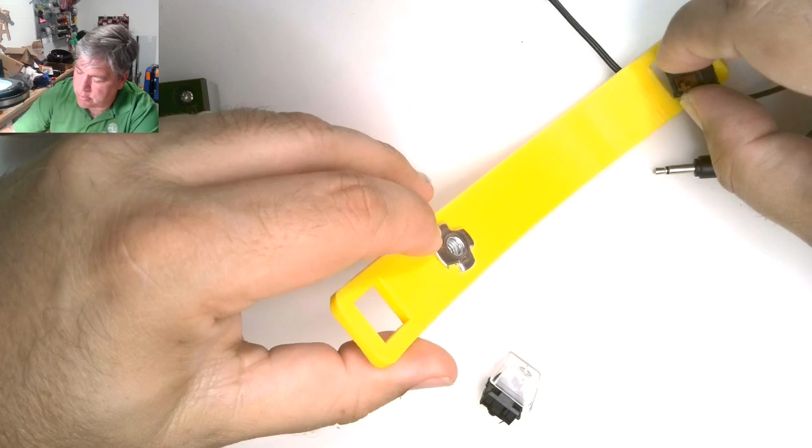The idea here is it's going to hold two MX switches, one here and one down here, in the holes which we designed in Fusion 360. These will be wired as two separate AT switches.

It turns out it really doesn't snap in, the other one pops right out. So after I solder these up, I'll hot glue them in place just for testing, to send it off and not throw this away. In the next version I make, I'll make the holes slightly smaller so they snap in better, maybe a little thinner right around it so they actually snap in and hold. I may do a couple test prints to see how it goes.

But all we're going to do here today is put 1/8 inch, or 3.5 millimeter, mono plugs on these cords, and then we'll hot glue them together.

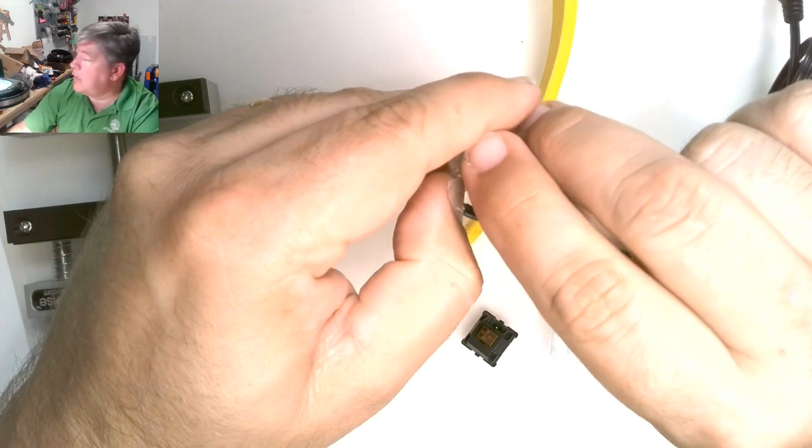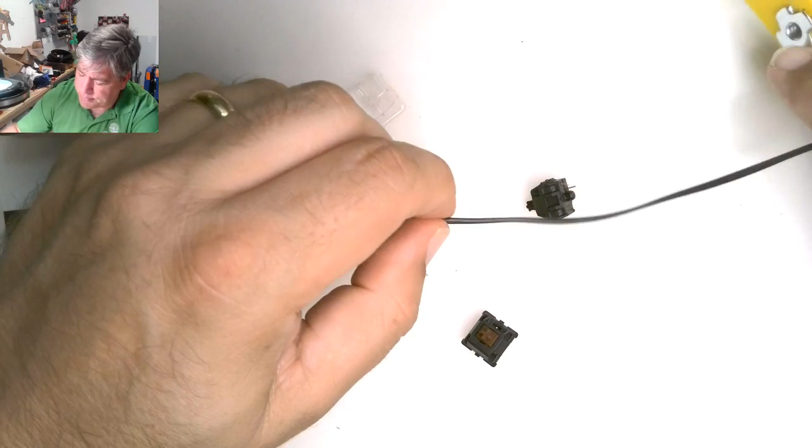Once that's done - what I'm printing right now is actually a very small light touch switch. I need 3 of them to finish this project. This is Chris Young's Ultimate Remote, and I have to finish filming something for him. I need 3 switches for it, and shockingly, I ran out of switches. So I'm going to solder these up, glue them up, then take those off the printer and make 3 of those. I'll probably do all that on camera, not sure, but probably.

Okay, so I'll probably turn off my camera here in a little bit. This is not plugged in, well, it's not going to work. All right, I won't turn on the fume evacuator because I think that'll be too loud with the fume evacuator and the printer both going, so I'll just do the best I can.

I really like this stupid stick vise. I was certain it was a waste of money - it is not, it's kind of awesome. I'm just going to tack solder these in place right here. I'm going to turn off my camera and get some better lighting and magnification, and hopefully my soldering iron is heated up enough to get started. So let's see.

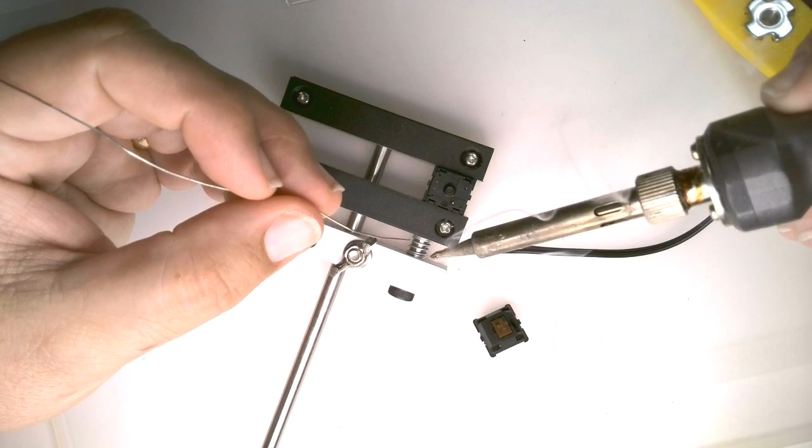When we do tack soldering, I've shown this before, but I'll bring it in to make it super clear. We put solder on the two pins like this. So the solder's on the two pins. And make sure there's solder on the wires, which they usually are. They usually come pre-tinned, but we'll add a little bit to them just to make sure. Then all we have to do is hold this in place, heat them up until they stick together, hold them in place while they cool, and then do the other one like that.

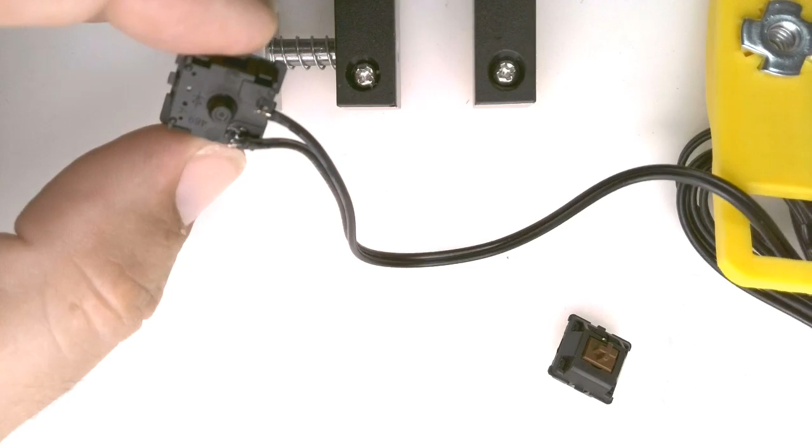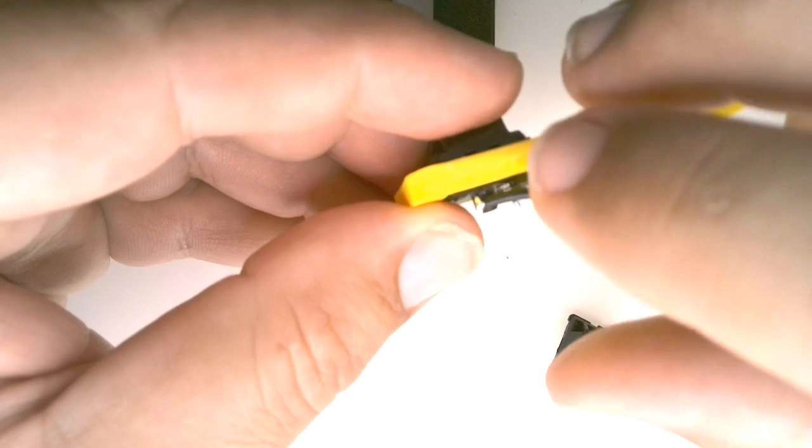And that's it, they're soldered together, and we're going to be holding them together with hot glue anyway. So now if I pull this back through carefully, I should be pretty good. I might want to turn that 90 degrees like that. Yeah, I think that actually fits a little better. We'll take this, run the wires down the side, and we have this quarter-20 threaded nut here, so I don't want to run the wires on the bottom right here because I want to be able to screw into this.

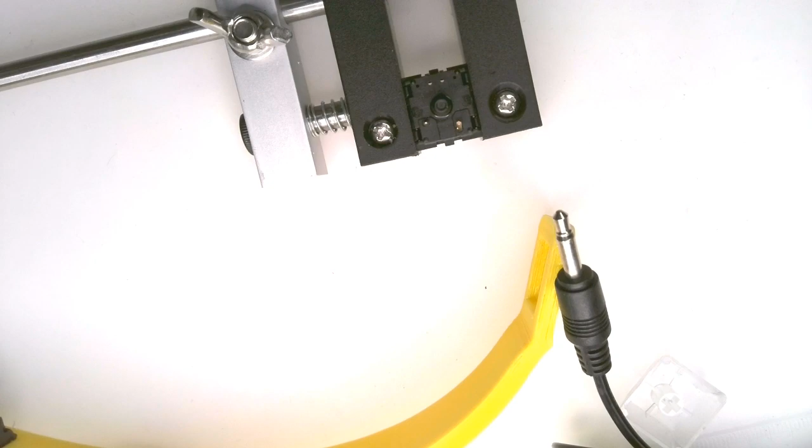So I'll run them down the side, and we'll hot glue this in place. Let me do the other side real quick. So put this in here. I didn't expect to like the stick vise that much, I really do. Where's my other one? I had two cables. Let me go grab another cable, it'll just take a second.

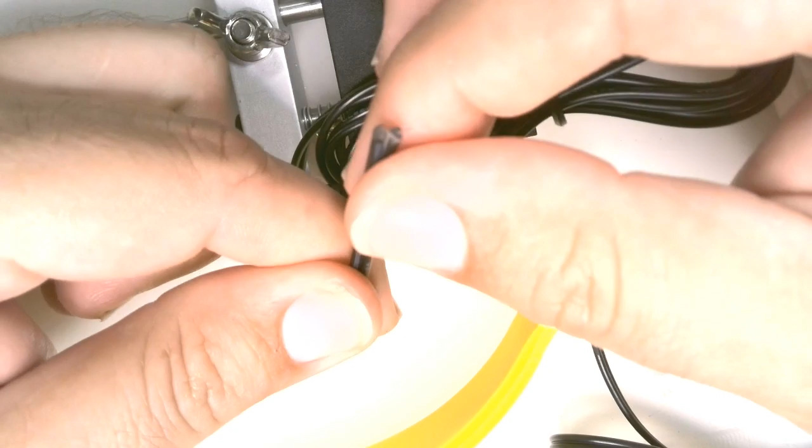So I bought these cables from China, from AliExpress, by the hundreds. They were well under a dollar a piece, and they're standard mono 3.5 millimeter plugs. On the other end you've got two wires. One of the nice things is that you actually have two separate wires. You don't have to use the shielding for one, or worry about how to get them separated and that kind of stuff. They are actually two separate wires, which is nice.

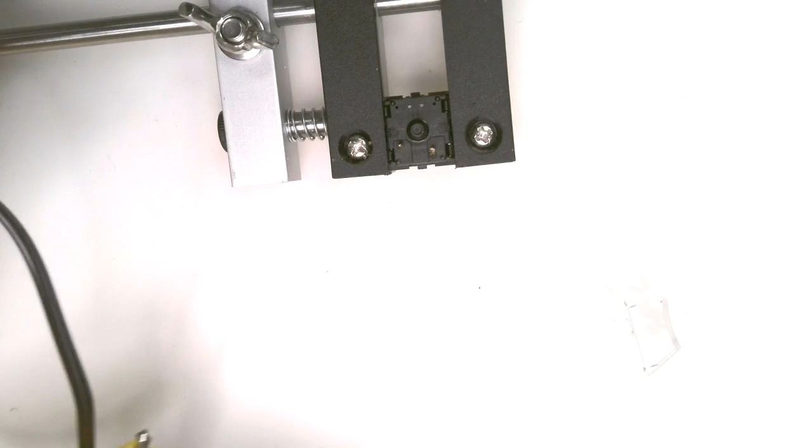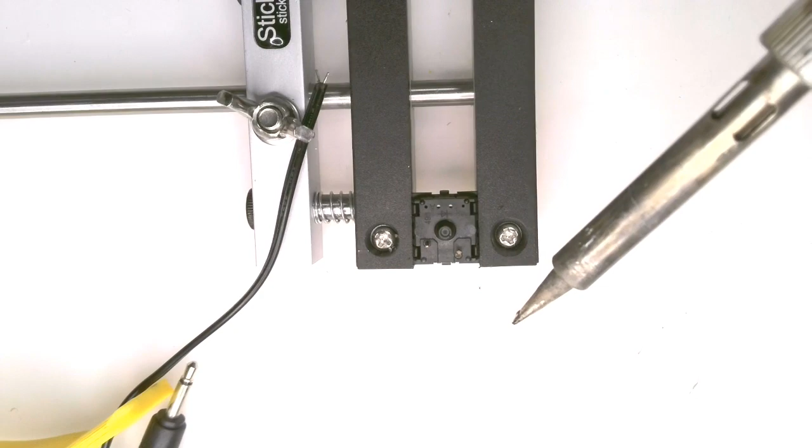We'll just do the same thing we just did on this one. We have to run the wire through the holder here, and let's see, tin the pins. And then just make sure the wires are tinned. I have a helping hand, I should probably just use it, but it doesn't seem like it should be necessary.

There you go. And once again, we'll just make sure this is twisted the way we want it. Hold these two together, let them cool. Put that in place, let them cool. They're good. Like this.

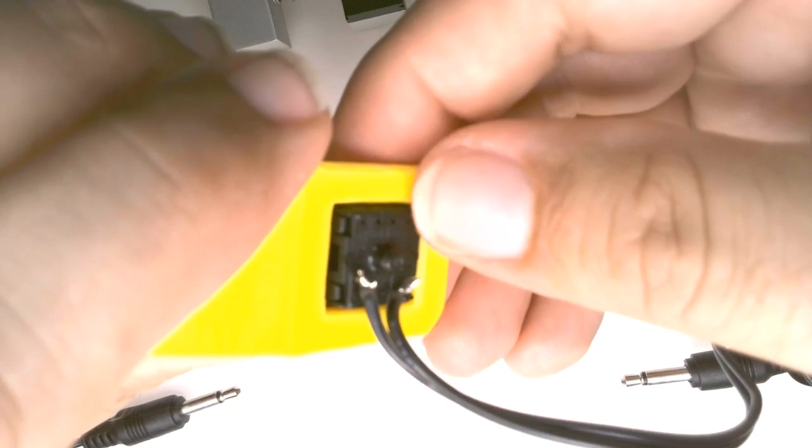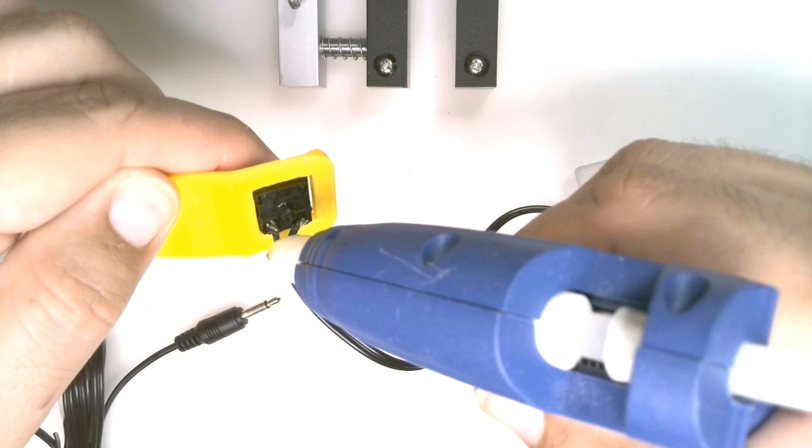I definitely could use some more hot glue to hold it in place. Yep, so let's do that, let's get some hot glue for the backs here. And that's the best way to hold this so you guys can see it. I don't know, it's hot glue, I'm not going to stress about you guys seeing it right. So I'm hitting each of the two leads, and then just kind of hitting all the way down the side here.

I'm not crafty, so. Let that cool for a second.

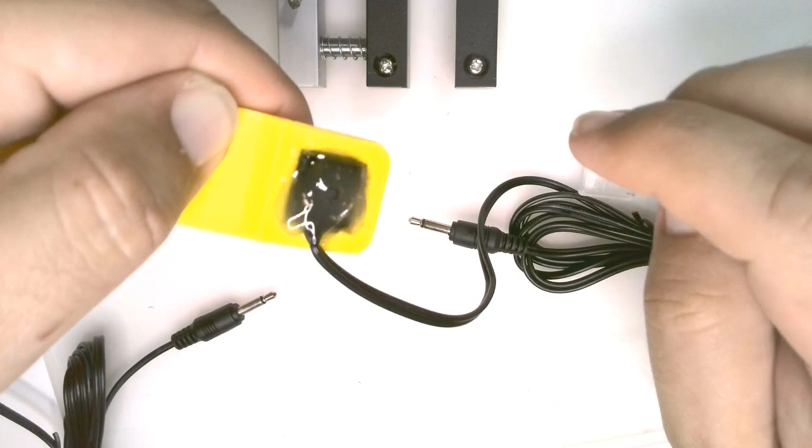So really kind of messy. Okay. I'm sure there's a hundred people on Pinterest all upset with my hot glue fiasco here. Alright, let's do the other one.

That one should be cool enough. Alright, so yes, this is the world's cheapest hot glue gun. It's a Walmart cheap special. It's life, it's fine.

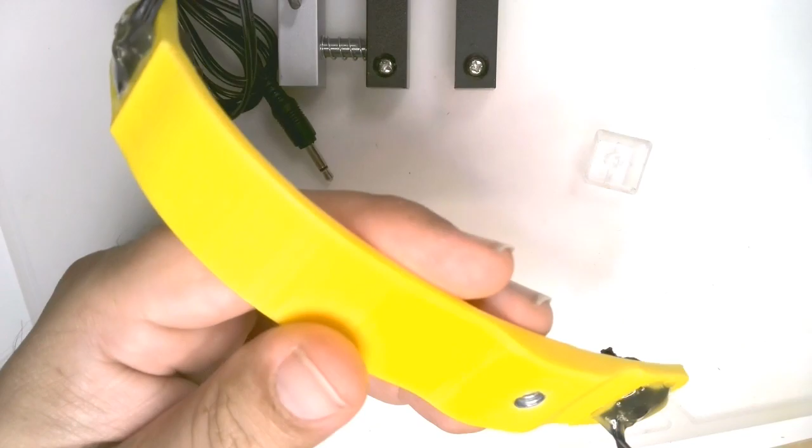Go. Alright, so there's two. Chris, I'm glad you're here, this is primarily to support your work. I guess the best thing I can do is just kind of set it here, here, I'll let you see it. And there's one cooling, kind of dripping. I don't really care, here's the other one. I think they're both okay.

And then this thing is at 75% done, so that's not good. But what else can I do in the meantime? I suppose I don't know, I could zip tie the wires. That would work, let's see.

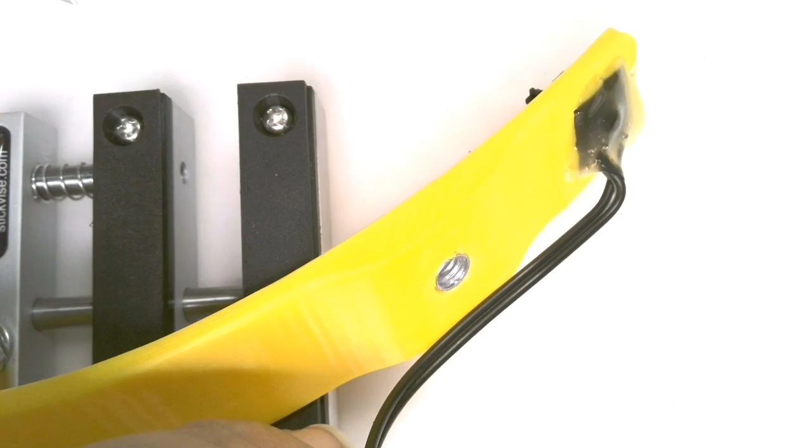So I'm going to take these wires and zip tie them to the sides here, like here and here, and then on the other side matching. I basically want the wires to come out here because I have a cloth that I can wrap around this, a sleeve that I have coming. So I'll put this guy here. This is primarily just strain relief. Yeah, it's not going to look the best, but...

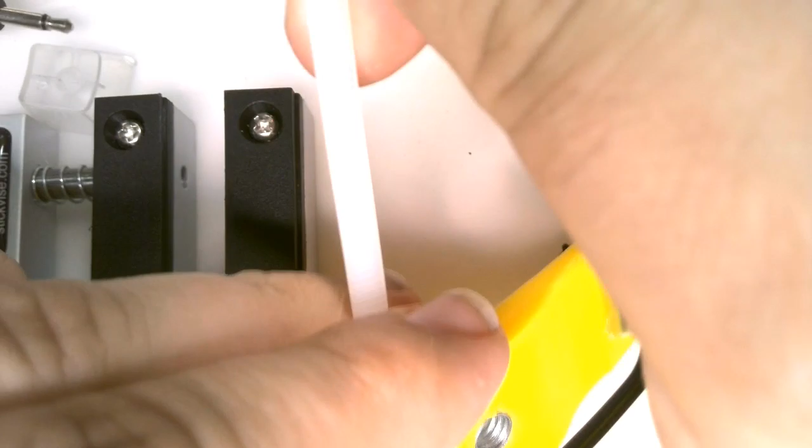So let's put this on the side. Come on, there we go. And then there's one. And then the other side will go down the other side. How about that?

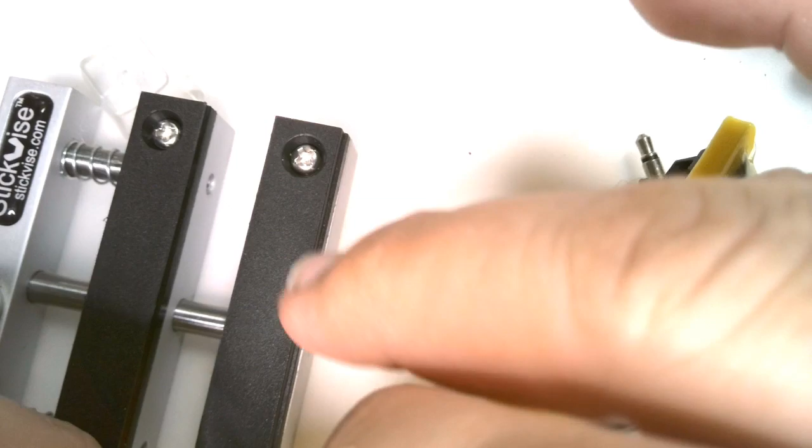That's unfortunate, but it's fine. There you go. Good enough.

So I'll walk you through this. The 2 caps will go on here, like this, and like this. And so this should work.

Hot glue's cold enough. Let me see if I have a 1/4-20 I can show this on. Alright, let me see if I can show you guys how this thing is supposed to work while we wait.

So here's the device with the 2 wires coming off the back. Those will go to your 2 inputs. The idea here is to hold this in place and give you the ability to activate with your chin and activate with your cheek. So just to see if it works, with absolutely no testing, we'll find out.

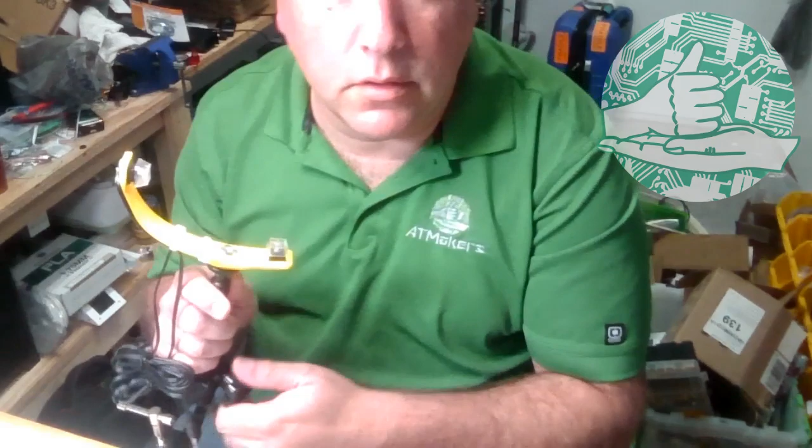I think so. Not sure, but certainly better than not having an answer, and the fact that you can use a friction arm like this probably helps. Other nice thing about this is you could hit this with a heat gun and position this and mount it in any direction.

Chris says, I've always wondered what Phil uses to stream. He streams on something like 4 or 5 platforms. He uses Restream, Chris. It's a service you pay for. If I do get more back into using YouTube, it's probably a service I'll pay for. But he uses Restream, and I think he had a video about how it works. It does work very well.

So Chris, I'd love your opinion on this one to see if this would work. I don't think it would work for you particularly, but with your friends and their challenges, I'd like to know if you think it would be a reasonable way to do this.

It is a product. Chin and Cheek is a product you can buy from R.J. Cooper, but it was showing up as discontinued. So let's just hold this. I don't know if I can actually do a decent job of showing it, and I think I would actually probably do it this way.

That's kind of more how it was designed, right? So you get this and that. So if you have basic minimal movement of your head and neck, you can do it, but you'd have to position this mounted from the side, which probably wouldn't be that hard.

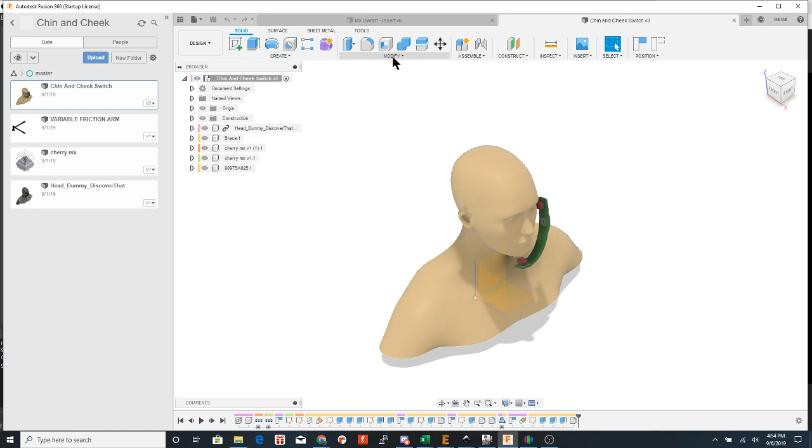Let me change this to here. Yeah, you can't see my camera in here, sorry. But so here is the chin and cheek switch, hopefully you guys can see that. And so what I did was I grabbed a bust.

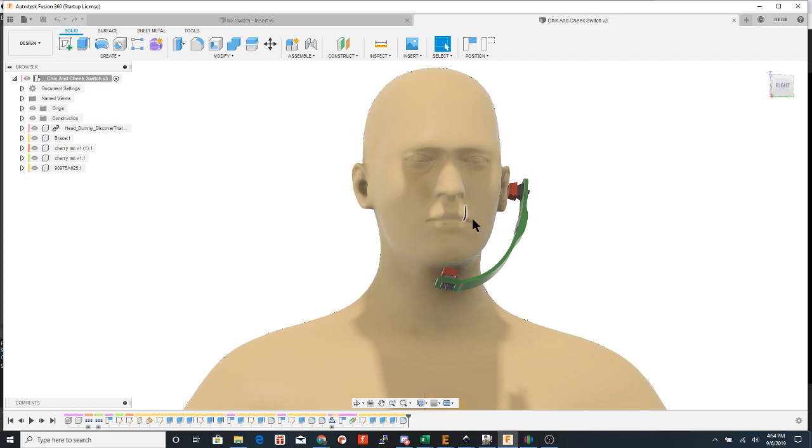Basically a human form, a scale human form that was available on GrabCAD. I brought it into the model, and then I placed the switches—I have MX switches, they're already modeled, actually they came from Adafruit. So I placed the two switches where I wanted them to be, and then I made a sketch, which was pretty straightforward. So here I can kind of walk you through the steps here.

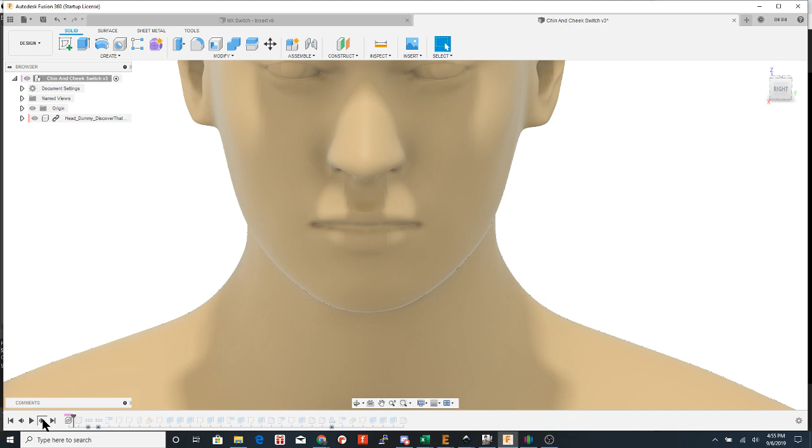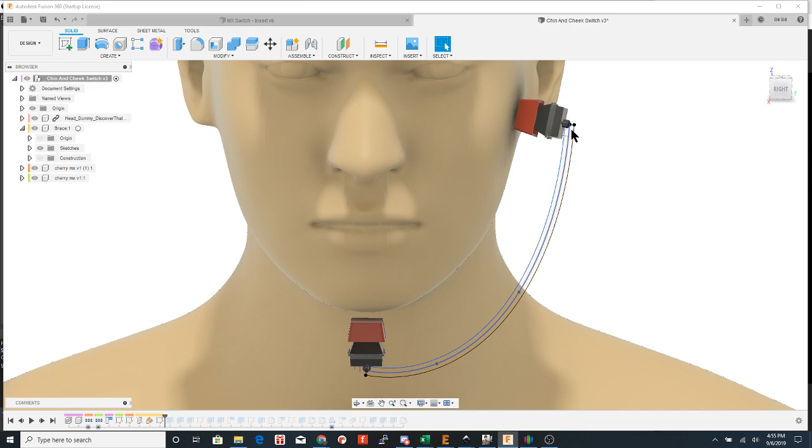So I added that in, and our print is done. I added the two switches. The sketches are probably turned off, so let me turn them on in a second here. Yeah, so let's turn these on. So yeah, I made a sketch that went between the two of them. I extruded that out to make the basic brace.

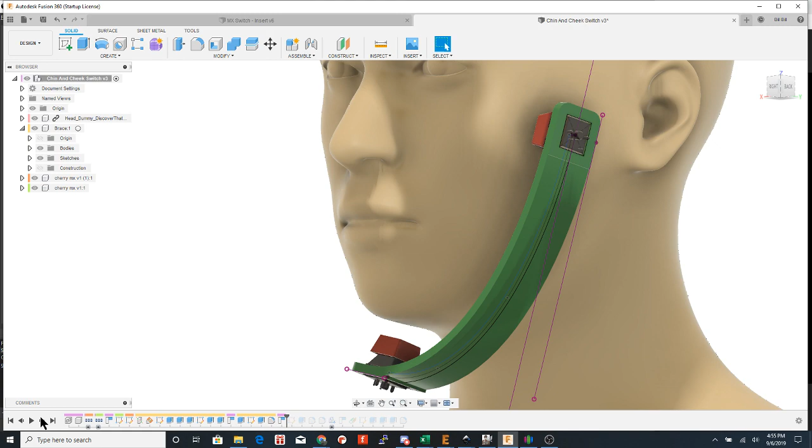I added a little bit of length to make it easier, and squared off the end, cut a couple holes, and then I rounded the corners and added the 1/4-20 mount, which should be coming shortly. So let's see—yeah, so I added in this part, which is the T-nut right here.

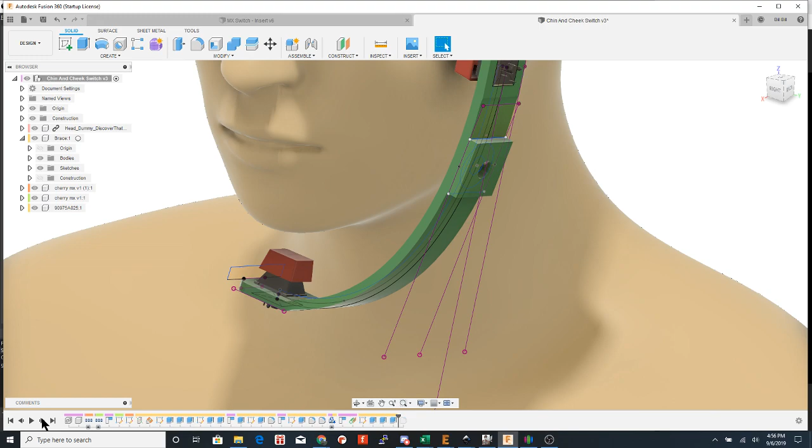That came from McMaster-Carr. I cut some holes for it, extruded that out, rounded some corners, and really that's pretty much the whole part. But one of the neat things about that—let me turn the sketches off so you can see it better—is that it's a really easy part to print, because if you take a look, it only changes in 2 dimensions.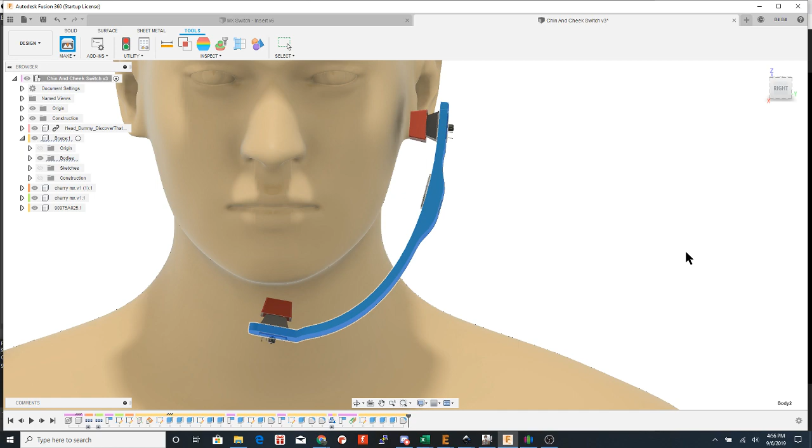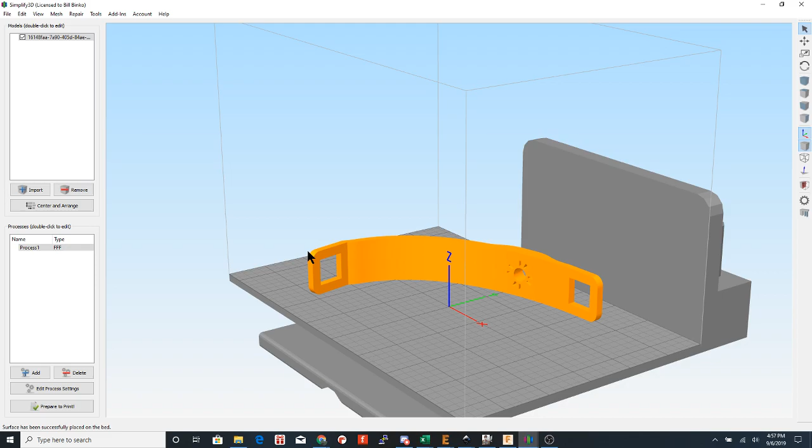So that means it makes it very easy to print vertically. I'll show you. All right, so ignore this part here. So it comes in looking kind of strange and warped, but it's really not. All you have to do is choose a plane along here to lay it down, and you'll see it actually is planar—it will just print kind of like that. So yeah, I'll show you, there you go. So it prints nice and straight.

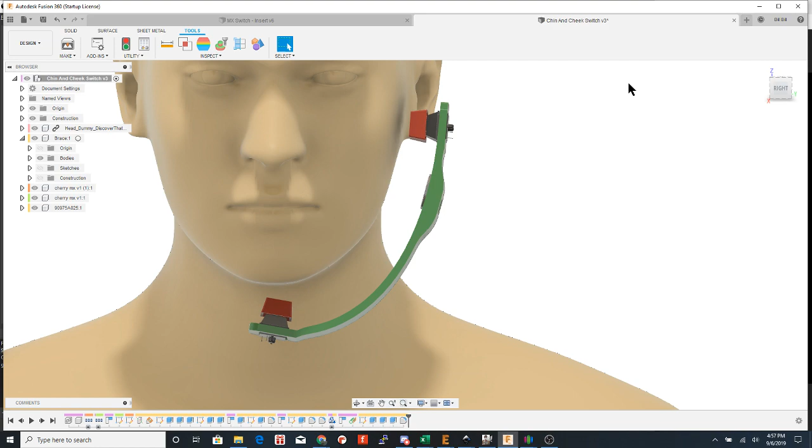It was what, 1 hour and 6 minutes. So it's not very long, and that's high density for 1 hour and 6 minutes, and all good. So let me see if I got any questions. Go back to the face. Sorry, I'm in a room without a second screen, so there's a limit here to what I can do.

All right, so other questions. Let me quickly show you. Oh yeah, there's the ultimate remote. And Chris, I need to get your fix to that code installed. So here's hot off the printer.

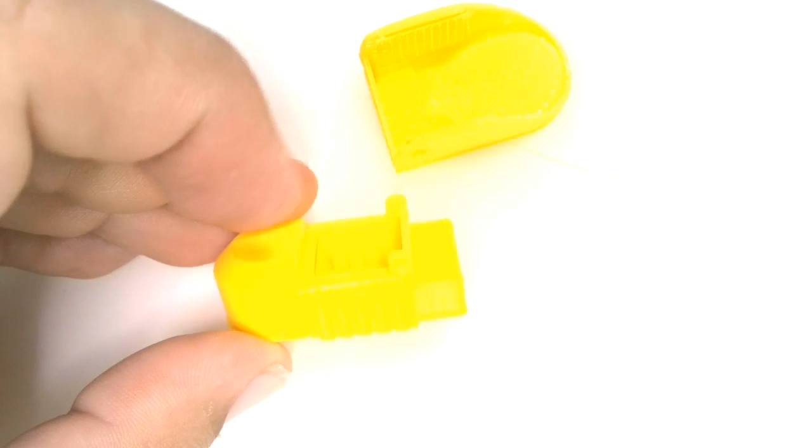Here's a MX switch that we make. It uses the MX keyboard switches, and I need to clean it up a little bit, pull out some supports. Supports are kind of optional, kind of not.

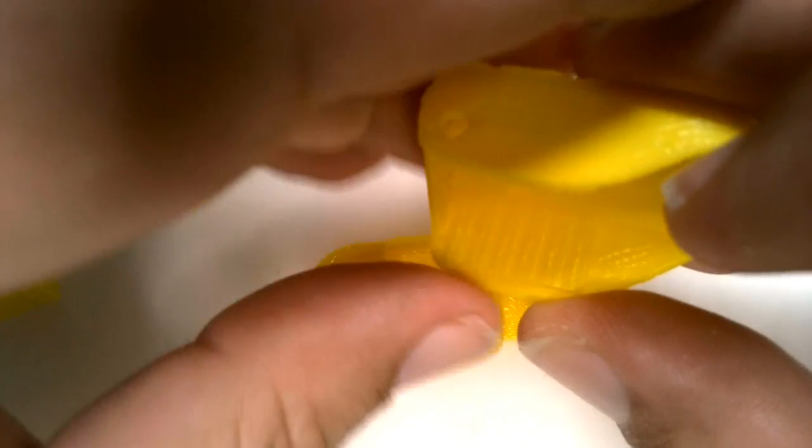Let me see here. The inside supports are optional. I turned them on because the quarter 20 thing really does kind of need it, so this hole needs supports. And I should have just checked the box that says only create supports from the base, but I didn't. So this is the part that's going to hold the switch. And then in here, these supports are kind of a joke—they just hold up the flange there, they don't really do much.

So this is the top, and it's going to pop over the top like this. And the switch will act as a spring to hold that up. And yeah, just like that, it'll push it back up.

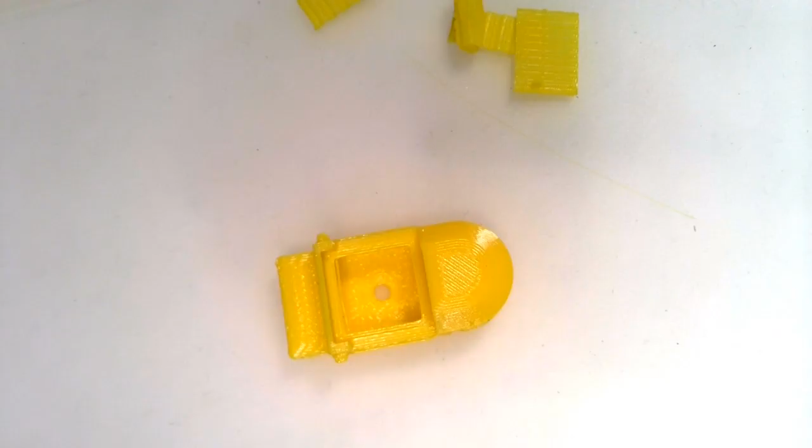So let's go ahead and make one of these. And I'll put the quarter 20 in later with the press, but I'm not going to do that on camera. So let me get a switch. It's going to pop in just like that. And oh, I need another one of those cords.

Same exact process here. Oh, I forgot to remove something, so there's this piece here too. There you go. I really should have left off supports on this one. So to make it work, you've got to basically thread through some of the wire.

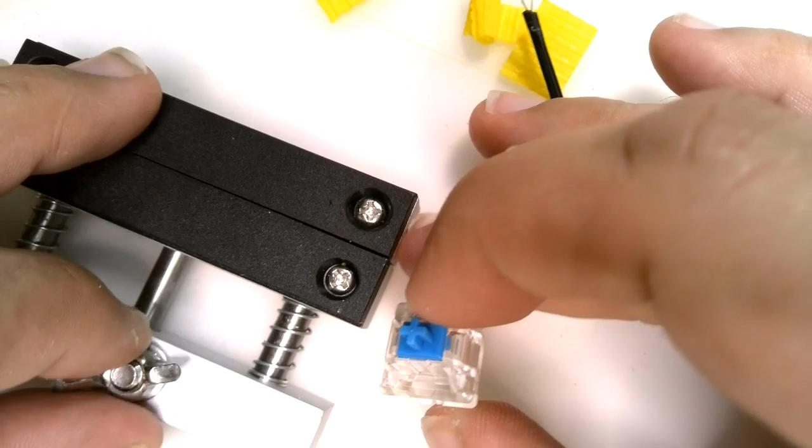And then we'll use the stick vise again. Same basic approach here, nothing new. I did order a whole bunch of cherry green switches. They're the right clicketiness for AT, I think, at least for me.

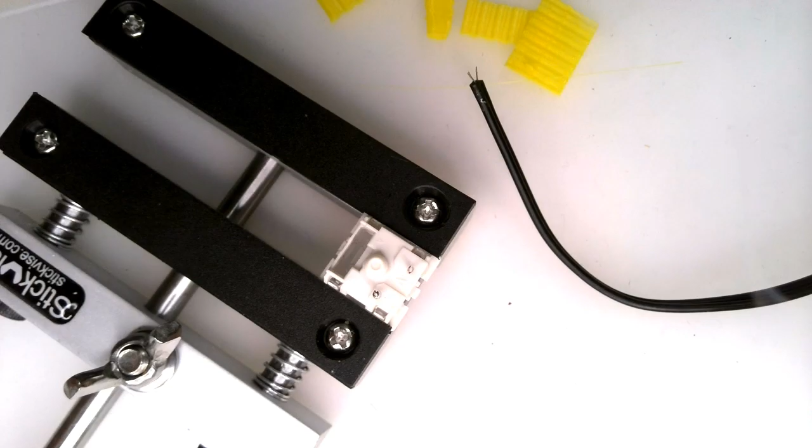I got the hot glue gun out. I'll probably go ahead and use it to hold these in place. Okay, got those, and these are already tinned, so it doesn't really matter, but it doesn't hurt.

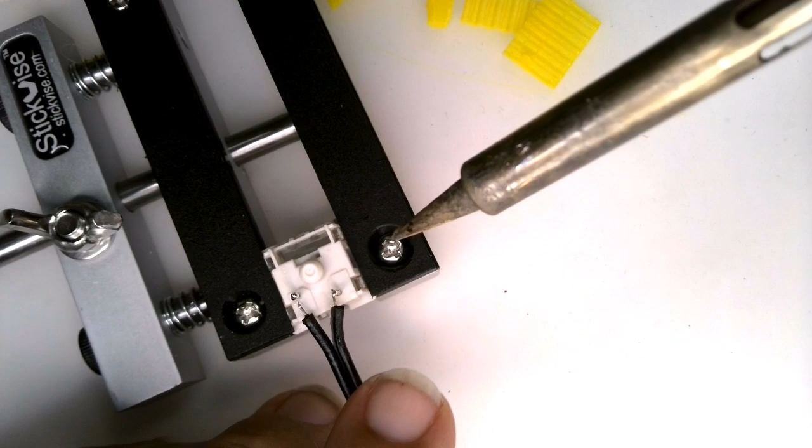All right. There's one. There's the other. Pull this through. Now we have a couple things we want to do here that are a little different here.

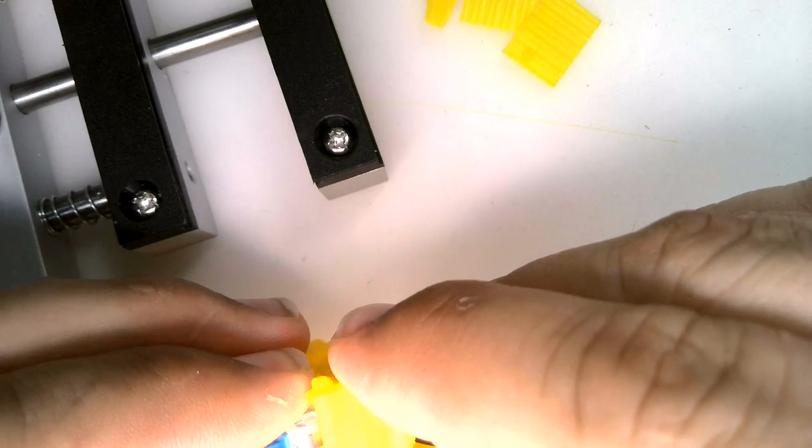So that'll totally work. But I have the hot glue, so why not use it, right? So go ahead and seal this up with hot glue, both on the actual solder points and then also just a strain relief on the wire.

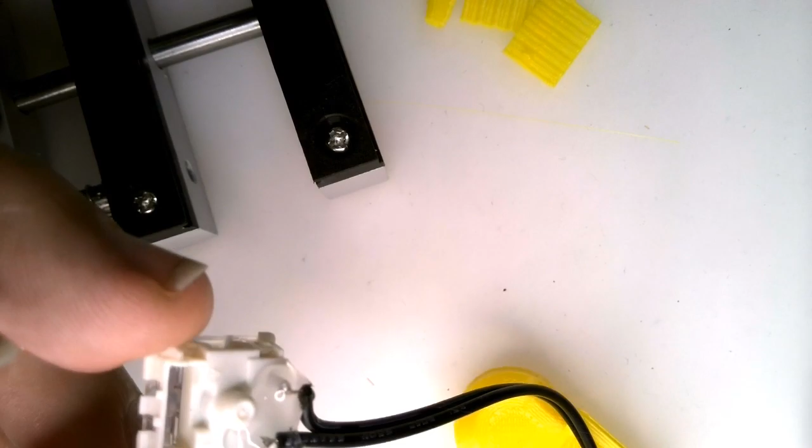I would not normally do this, but it's already hot. So there's one.

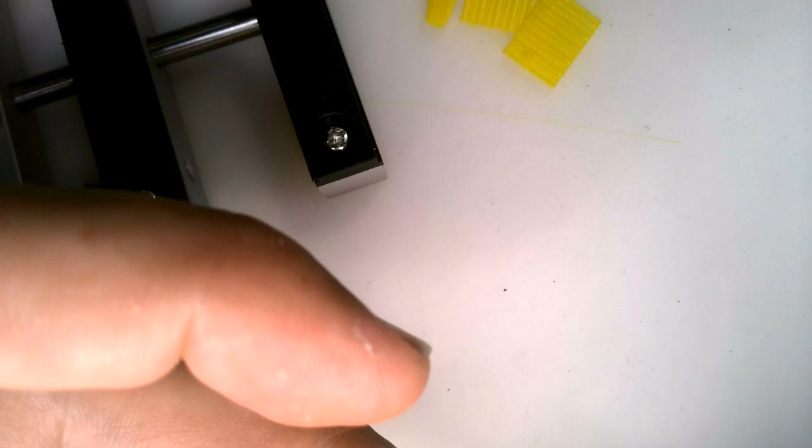Go. Get some glue on it. It's gonna get in the way. There we go. Get the lid, the cap for it. Put this on and claim victory. How about that?

There's 1, 2. Yep, of course. All right, so let the hot glue... God, that's just everywhere, that stringy mess is just everywhere. So, but there's your switch. So there's one of the 3. I'll probably do a pink one and a green one.

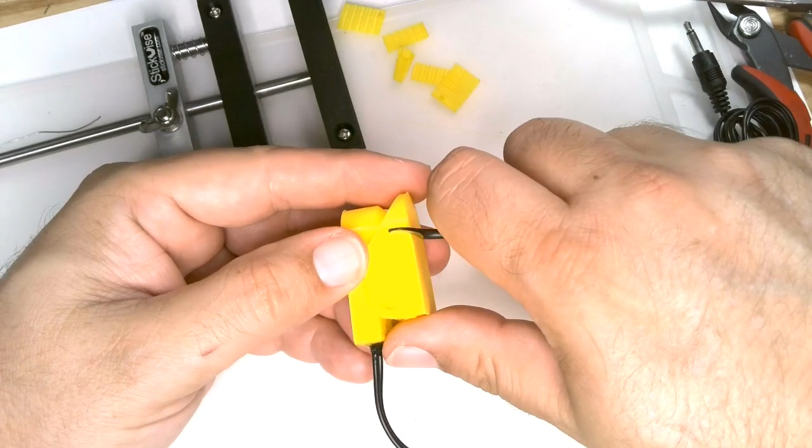And then I might take, I bought one of these deburring tools. And it does kind of have a little bit of a lip here. So I'll go ahead and clean that up a little bit, just to make it nice and neat. Should have done this before I put the cap on, but I didn't.

So there we go. Then back on the peg. Back on the peg. All right. Last thing to do will be to put the 1/4-20 threaded insert in. I'll do that when they're all done, I'll do them all at once. But there's one, and I will probably...

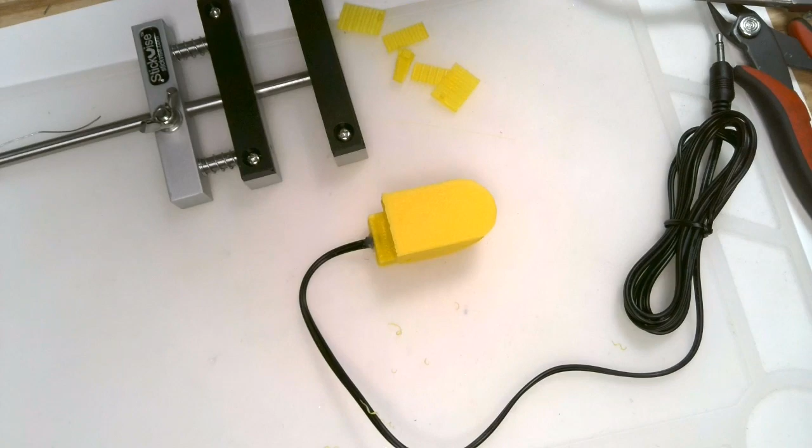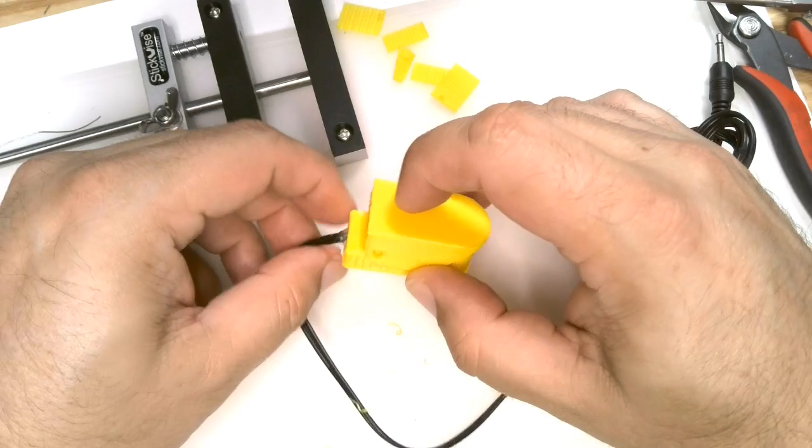All right, so I'll have, I'll do a pink and probably a green. I'm just looking, oh, I have an orange. That would be a different, and obviously they'd be very bright ones. So I'll get a yellow, a pink, and an orange.

You have any preferences, Chris, for colors? I doubt if you will. So, probably not. I'll take a look and see.

I know I should be using green for everything, but Amazon has been out of green on the Hatchbox PLA for, I don't know, a month and a half. So I've just been using other colors, which is probably fine. So, all right, you can always tell me what colors you want.